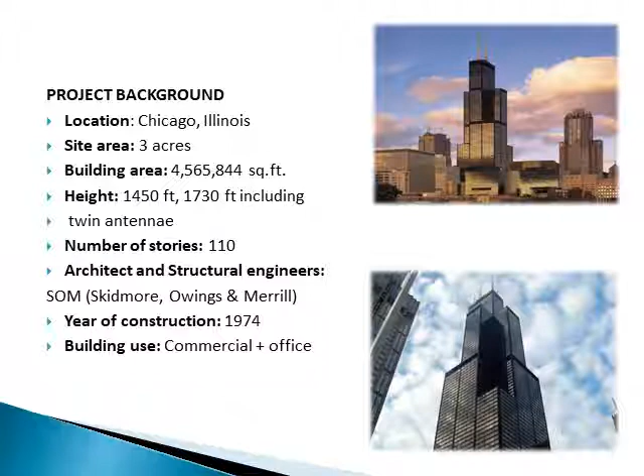Architect and structural engineer are Skidmore, Owings and Merrill. Construction year of the Sears Tower is 1974. Building use of the Sears Tower is commercial plus office. The architects are Skidmore, Owings and Merrill, known for modernist design and sophisticated engineering, and the engineers are Bruce Graham and Fazlur Khan.

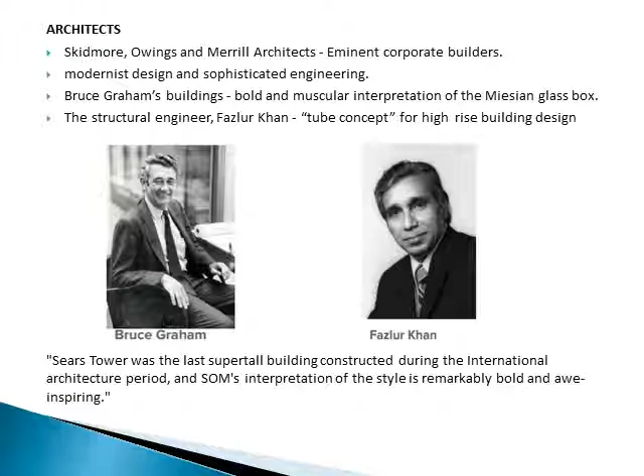The Sears Tower was the last supertall building constructed during the international period. And the timeline in which the Sears Tower was built: in 1968, Sears Group decided to build their headquarters; in 1970, groundbreaking and substructure; in 1971, superstructure construction was started; and in 1974, construction completed.

The unique facts are that the engineer of the Sears Tower used the bundled tube effect, which was the most efficient, economical and suitable structural system. The most unique facts are the observation deck at the 103rd floor, visited by about 1.3 million tourists per year, and the elevator soars up to the observation deck in 60 seconds.

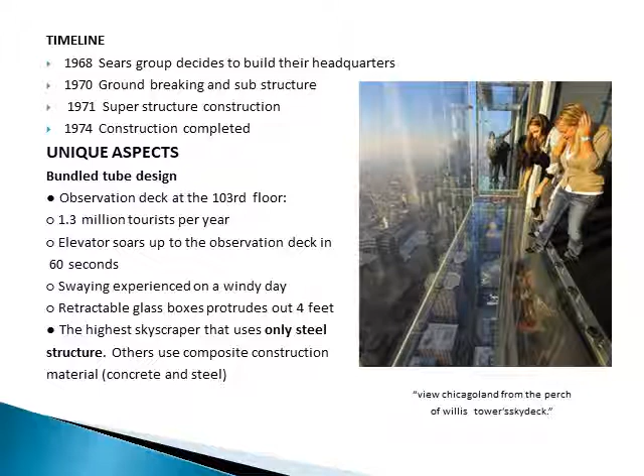This is the view of Chicagoland from the perch, and this is the only skyscraper which uses only steel in the structure, while other buildings use concrete and steel in composite construction. These are the naming rights: the Sears Tower changed its name to Willis Tower on July 16, 2009, by Willis Group Holdings Limited, and the naming right is valid for 15 years.

The functions: it contains offices, a private dining club, conference facilities, a U.S. Post Office, and retail stores. The site covers an area of 3 acres, and public transportation access is from the suburban railroads and bus network.

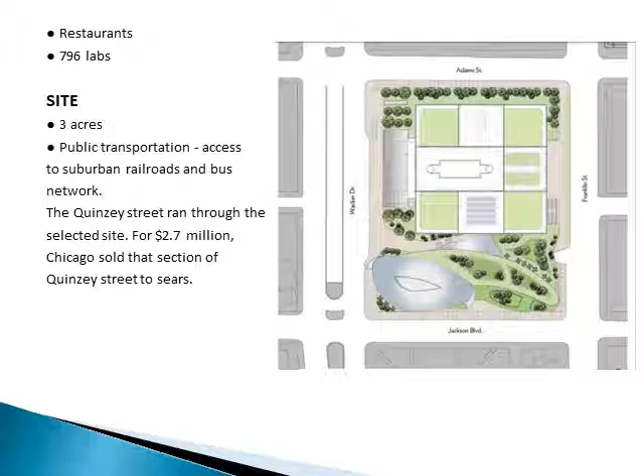Building height: the building construction was completed in 1974. It remained the tallest tower in the world for 25 years. Now its global ranking is 17th tallest in the world, its national ranking is 2nd tallest in the United States, and its city ranking is 1st tallest in Chicago.

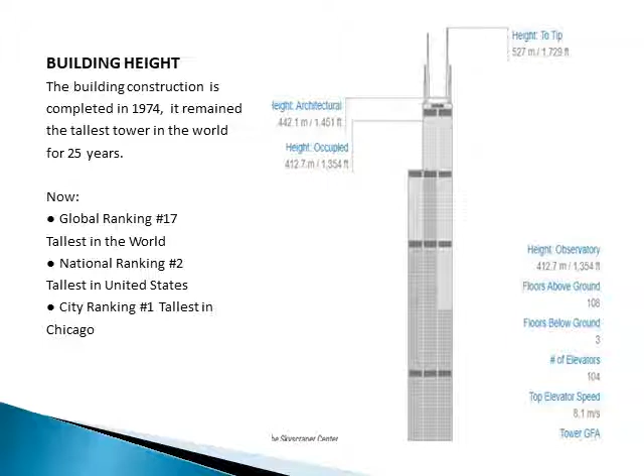Materials: structural steel, cladding of black aluminium and bronze tinted vision glass panels. The structural system is tube construction, and Khan used the perimeter tube structure instead of a central core.

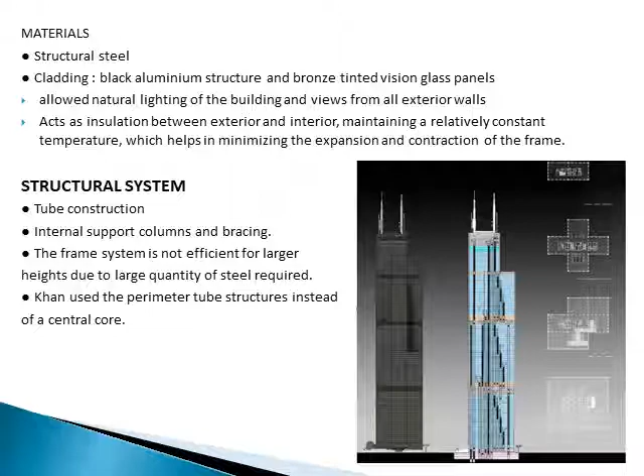Bundled tube structural system. One of the most efficient structural systems against heavy wind loads is the bundled tube structural system. The first person to implement the bundled tube structural system was Fazlur Rahman Khan from Dhaka, Bangladesh, with the design of the DeWitt-Chestnut Apartments in Chicago, Illinois. The landmark and iconic building that uses the bundled tube structural system is the Willis Tower.

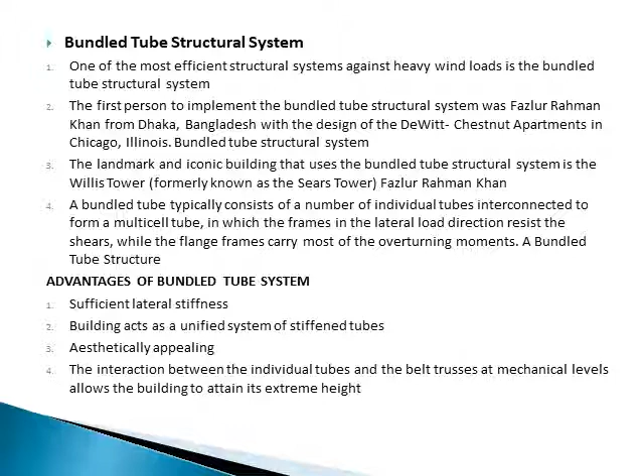Fazlur Rahman Khan. A bundled tube typically consists of a number of individual tubes interconnected to form a multi-cell tube. The bundled tube design was not only highly efficient in economic terms, but it was also innovative in its potential for versatile formulation of architectural space. The bundled tube structure meant that buildings no longer needed to be box-like in appearance; they could become sculpture.

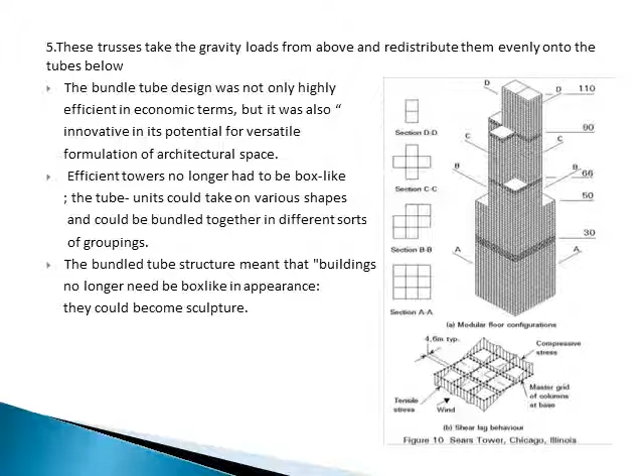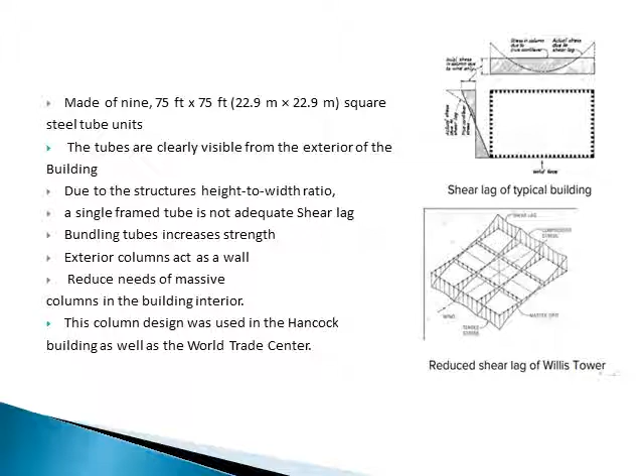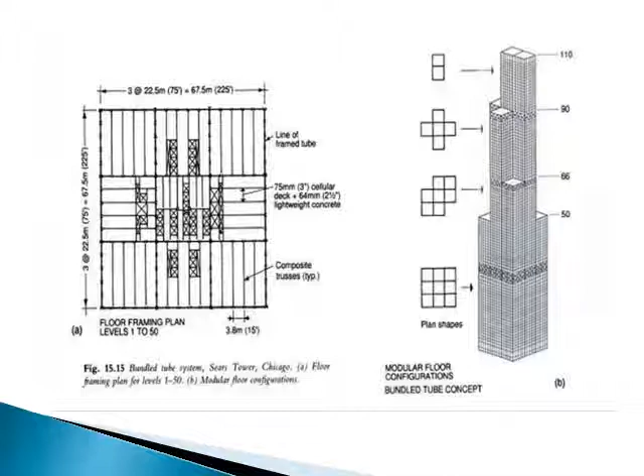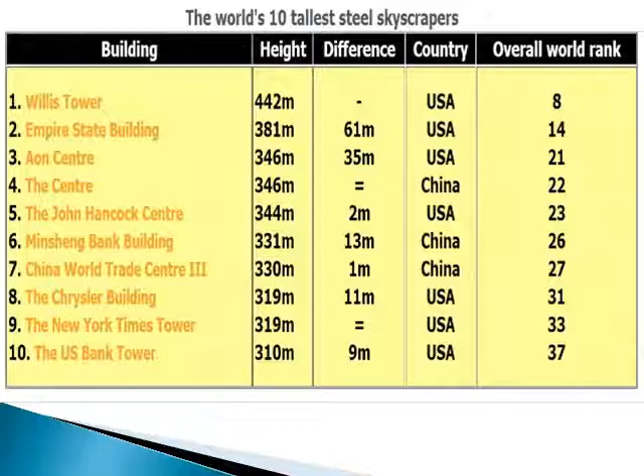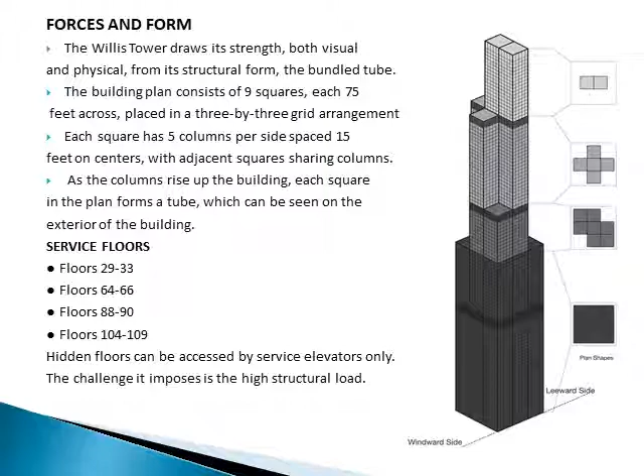There are some structural elements like independently strong truss connections, spandrel beams, and truss levels, which also contain mechanical systems hidden in the facade. Louvers mask the structural details. Trusses receive gravity loads.

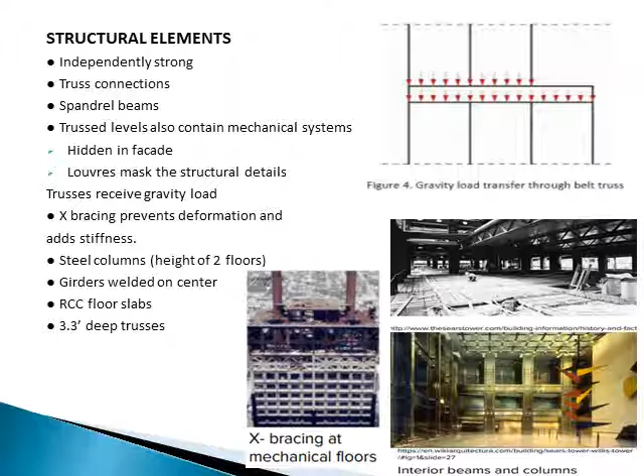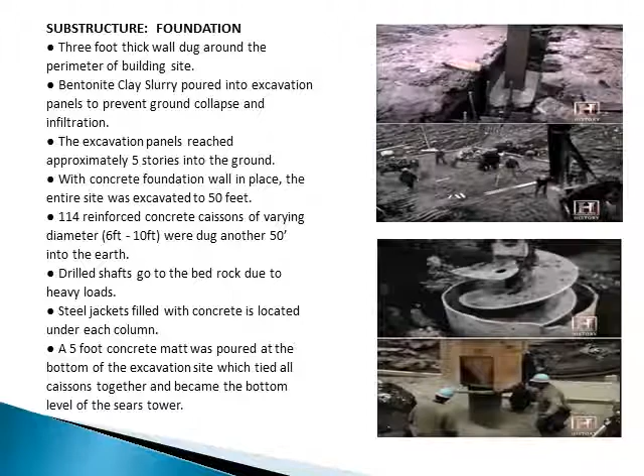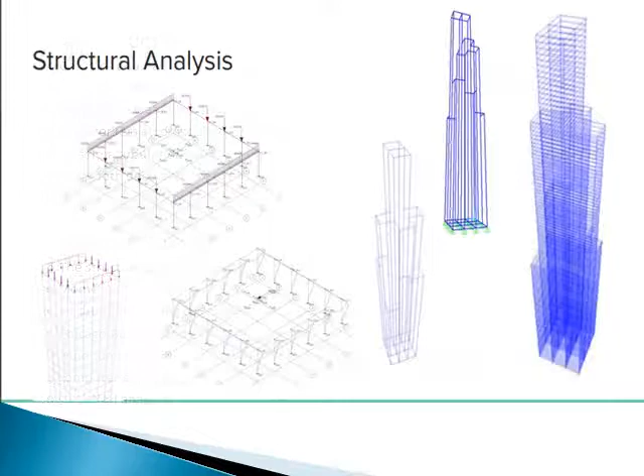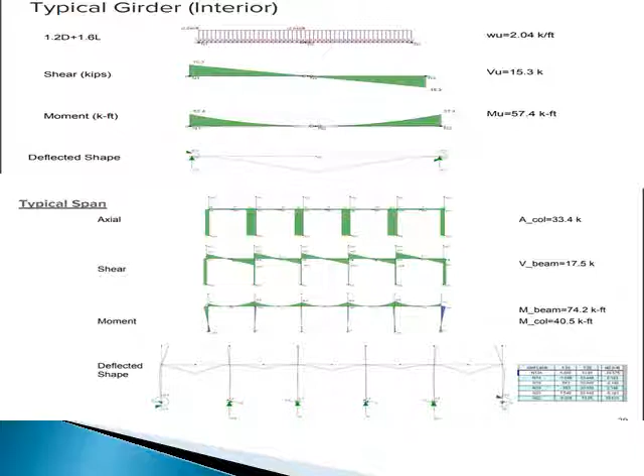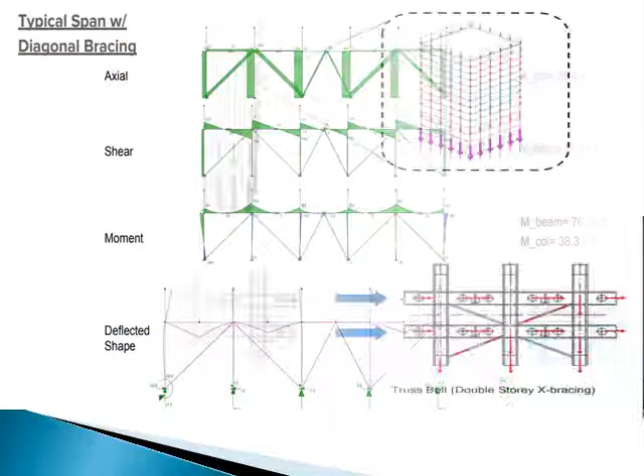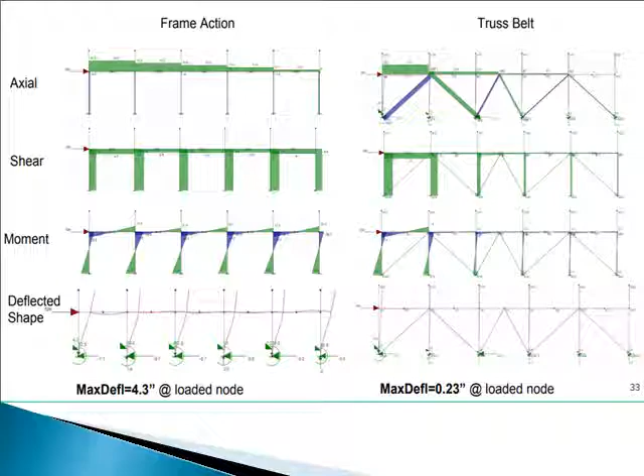Typical interior girder, 1.2D plus 1.6L, shear, moment, deflected shape, typical span. Typical span with diagonal bracing, axial, shear, moment, deflected shapes. Overall lateral loads like frame action, truss belt, double story X bracing. These are the frame action and truss belt action in axial, shear, moment, and deflected shapes.